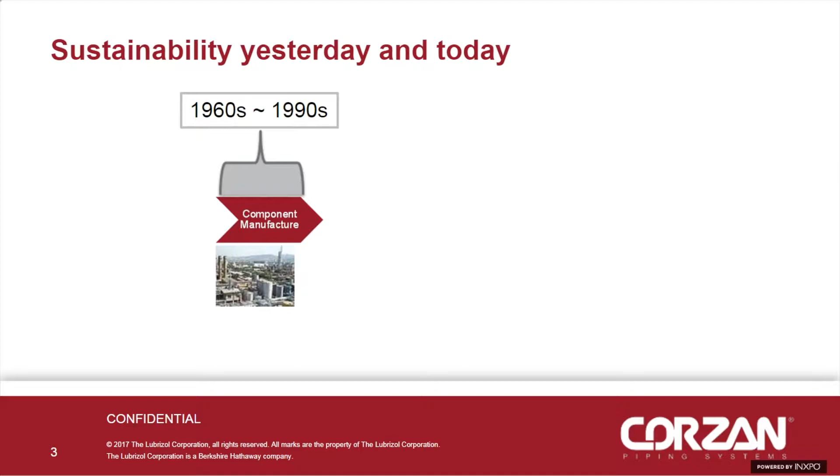And if we can advance the slide to number 4 there. Let's see if... there we go. What's really happened since that early phase is growing sophistication in the analysis and a growing awareness that there's more to environmental impact than simply what happens inside the gates of a manufacturing facility.

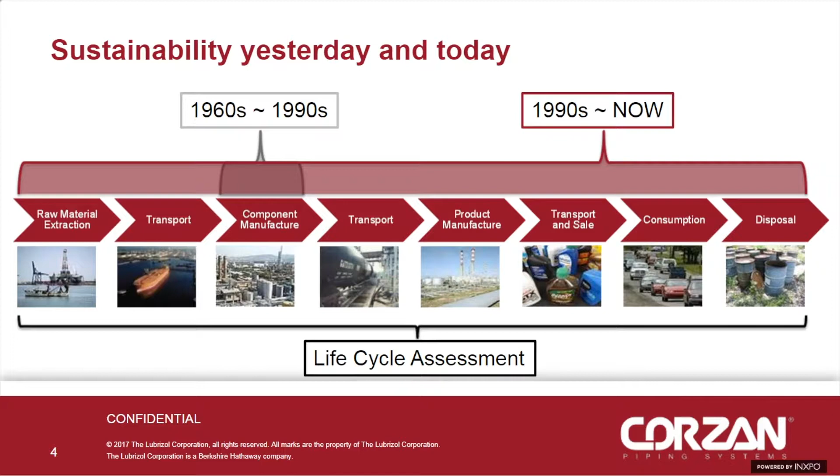So to look at the true life cycle of a product means going upstream to raw material extraction, through the transportation of the materials, the manufacturing of the materials, down through the finished product manufacture, again including transportation, the actual use or consumption, and the end of life as well. Taking the totality of all of those impacts is what life cycle assessment is all about.

What you're seeing here is a visualization of that analytical process, where every step has inputs and outputs. Usually the inputs are raw materials and energy, and the outputs are waste streams, be they solid, air, or water. By tallying them all up over the life cycle, that's when you get the total impact of a given product.

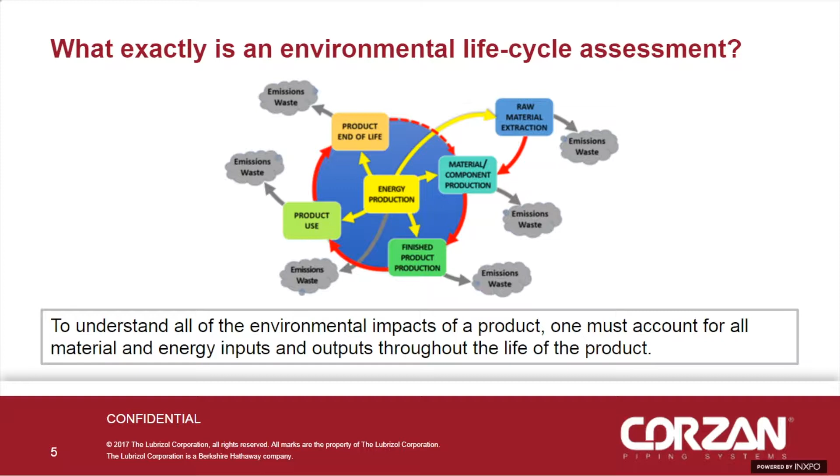There does seem to be a fair amount of confusion when we talk about terminology around life cycle assessments. You will frequently see businesses talking about emissions, energy, and waste, and these are all what I'd characterize as inputs to the analysis. They are the source of the environmental analysis that takes place.

What comes out of that analysis are what I'll call the impacts. Part of what drives me slightly crazy is everybody wants to be green. Well, there is no definition of green. Green is not one thing. When you talk about environmental impacts, you are talking about a basket of different impacts, be it acidification, which is an air emissions issue.

Acidification is the deposition of acids from air emissions onto forests, farmland, or urban areas. Climate change is probably the most well-known. Eutrophication is basically the runoff of fertilizer-type materials into freshwater bodies that leads to oxygen deprivation, and you'll see algae blooms that kill off all aquatic life.

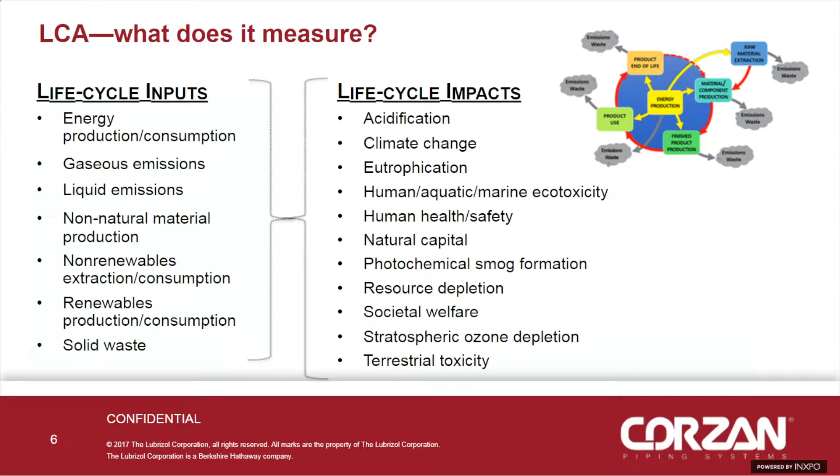If you were to take the life cycle impacts, what can you do with them? I think first you can use them to identify burden shifting. In some cases, you may change your manufacturing process to reduce your VOC emissions, let's say, but in that process you wind up increasing the burden at end of life because you've made the final product more hazardous.

The point is understanding that you can't necessarily guarantee that any improvement you make won't have a negative consequence, and life cycle assessments help you identify those trade-offs. You can either shift impacts along the value chain - I reduce my manufacturing and increase my useful life - or I make a shift among impacts, reducing toxicity but increasing climate change.

Or the final option: I'm no longer doing it myself - I've pushed it upstream to my supplier or overseas, understanding that it doesn't go away. It's still part of your life cycle, even if it's not within your gate anymore.

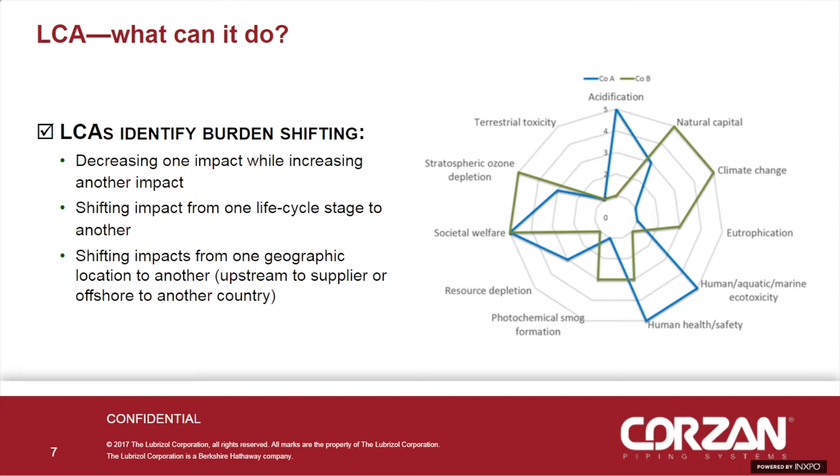The other opportunities that life cycle assessment provides are identifying trends. To the extent that you look at life cycle analysis over time, you can see a shift from one impact to another, an increase or decrease. It looks at orders of magnitude. Any LCA I look at, if there's a decimal point, I'm suspicious. The number of assumptions that go into an LCA analysis are such that it's basically safe for orders of magnitude change, but no more.

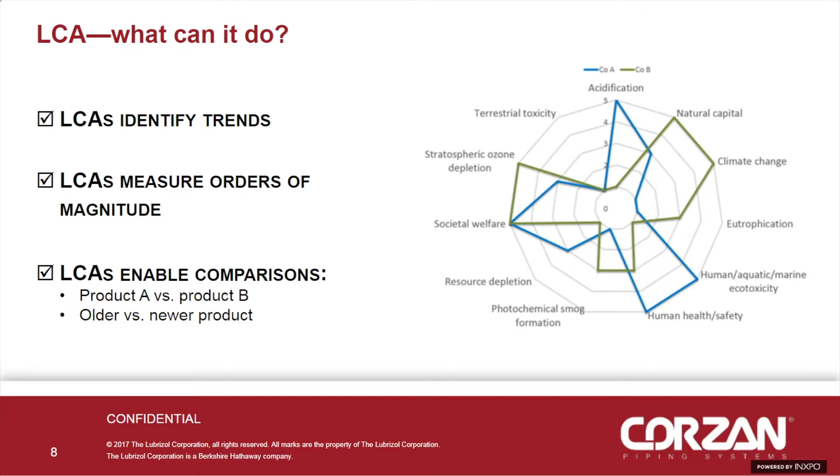It also allows you to enable comparisons among different products, and this is part of the challenge, either looking at different products or an older version versus a newer one. You'll frequently see in the contemporary literature third parties giving their opinion as to the environmental utility or threat posed by a given product or formulation. But those analyses don't necessarily tell you what you can do instead. They don't give you that comparative analysis. LCAs give you that basis for analysis.

What we're showing you now are a couple examples of the sort of work we have done looking at CPVC piping. And I'm going to turn this back over to Tom now to give you a more detailed understanding of what Lubrizol actually has been doing.

Thanks, Terry. So as Terry outlined, LCAs offer a very comprehensive assessment of impacts, and they can be used to optimize the resources needed to build and maintain our buildings. But with all this data, what do you do with it? How do you make comparisons? These LCAs can be over 100 pages of data, and that's quite a bit for any one person to sort through for every single building product in a building. You all know too well there are way too many building products in a single building to do that for every single one. So the market is starting to look for manufacturers and third parties to help them make those assessments.

So at Lubrizol, we've put in a lot of effort and work to generate LCAs on our piping systems and to begin comparing the outputs to other options within that functional category. You can see two examples here for plumbing pipe, CPVC and PEX outputs, and then also for fire sprinkler pipe, where we're looking at CPVC fire sprinkler pipe versus steel piping systems.

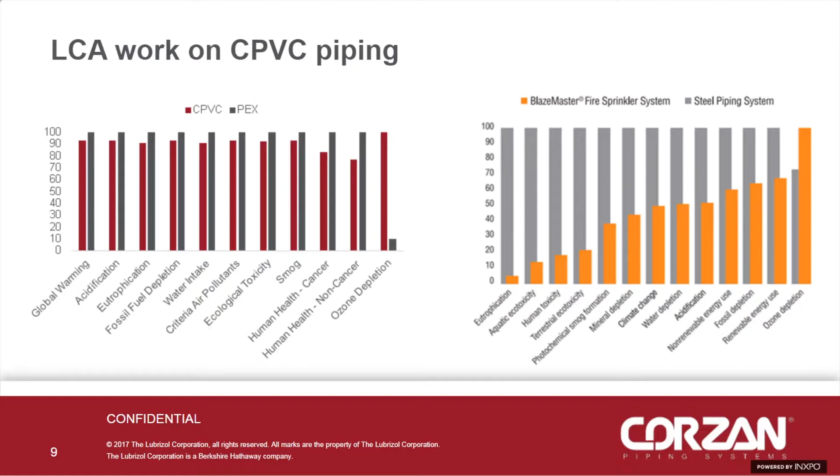And that's an important point I want to move into when we're talking about some of these sustainability assessment tools, rating systems. I want to talk a little about LEED. I think most people are familiar with LEED and what it has done for the building industry. For those that aren't, it's Leadership in Energy and Environmental Design. It's administered by the U.S. Green Building Council, and it's pretty widely accepted in the sustainable building realm. So I want to talk about how we can use life cycle assessments and the information from them within this context of LEED and what they're doing to help guide us in this realm.

So we talked about life cycle assessments and how they really encourage transparency. They don't give you a comparative analysis, and each output has its own individual unit of measure. So it's very much confined to comparing that output to the similar output of maybe a comparative material.

So how is the recent LEED v4 version helping us work through this? Well, it encourages transparency. By simply having a product LCA, that can get you credits toward your LEED certification. And more piping systems and fixtures are showing this.

The first one is integrative analysis, the second is health and exposure, and the third is supply chain optimization. For integrative analysis and supply chain optimization, these really are truly transparency credits. They encourage companies to perform life cycle assessments and really dig into their depths to find where they could do better, and share that information so people can make educated decisions.

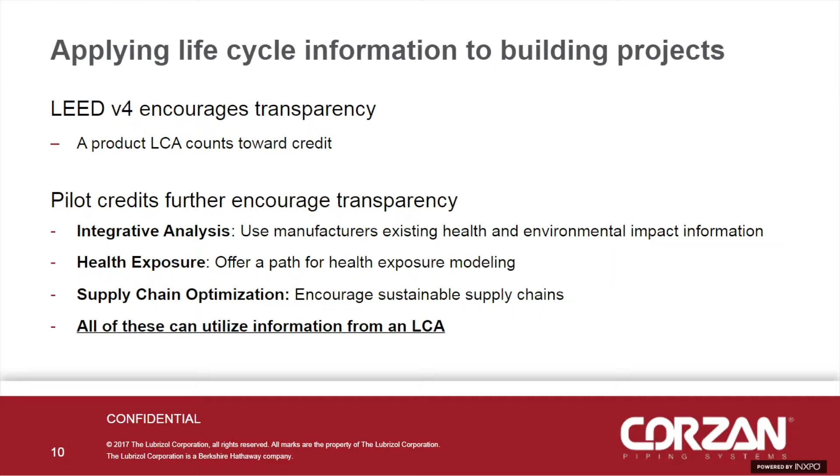The health and exposure credit is interesting because it takes some of the information that companies have provided and does exposure modeling, which is a new approach we hope takes off in the future. I don't have time to go in depth into these pilot credits now, but if you have questions, feel free to reach out to us or to the U.S. Green Building Council. We'll be happy to help you walk through those.

I want to talk a little more in depth about the integrative analysis of building materials pilot credit. This pilot credit was set up kind of like the outputs of an LCA. So you have various life cycle stages: product assembly, manufacture, installation, use, and maintenance of that product, and then what happens at the end of its life. You have three impact categories: human health, occupant safety, and environmental impacts.

The way this credit is set up is that the building product manufacturer takes the information known to them, which could be from an LCA, but could also be from other sources. It could be from safety data sheets, from product listings such as those through NSF or UL, or their own internal data. They can fill out this matrix with statements addressing each of these impact categories within each of the life cycle stages.

Those statements have to be backed up with documentation, but what it provides is a stepping stone for companies or people who don't have the resources yet to put into an LCA, but do have a lot of information and knowledge about their product and want to get that out there so you can make educated decisions about what you're using.

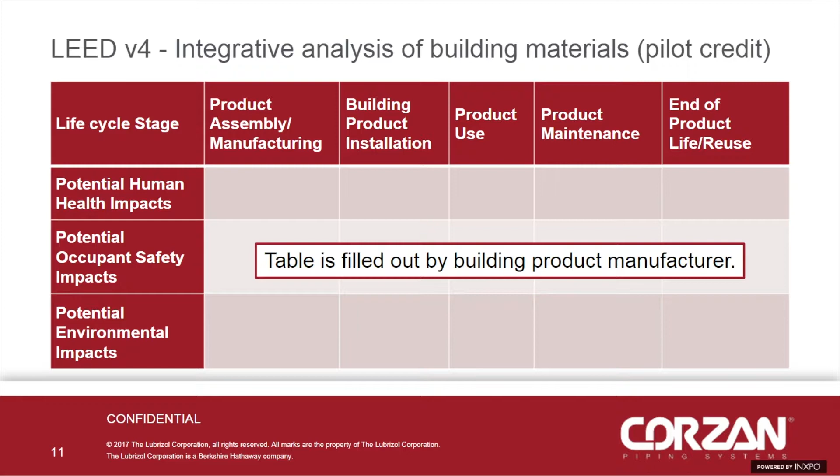I want to touch a little bit on occupant health. This, I think, is the one point within this whole realm of sustainability that piping systems can possibly have the greatest impact on, because we touch something that is being consumed by humans.

A lot of people have heard of Legionella and may be familiar with ASHRAE 188. There are two aspects of this standard: it provides guidance for prevention and mitigation of microbial growth in piping systems. For prevention, think about how a piping system material will change over time and how this will affect the harboring of bacteria.

If you think about sustainability within a building, you really want your systems that you install to last the life of the building. Having to take out and repipe systems really affects the sustainability and utility of your building and can introduce new hazards to the occupants. So the ideal is to install your mechanical systems into a building and not have to touch them for the life of the building.

Think about the effects of water on your piping components and how it might create opportunities for bacteria to be harbored. We're talking about corrosion and pitting in piping, lack of flow in piping systems as well. These things really encourage the growth of bacteria. So when you're thinking about piping system materials, make sure you're thinking about the system you're designing and the water going through it and how it's going to affect that piping material.

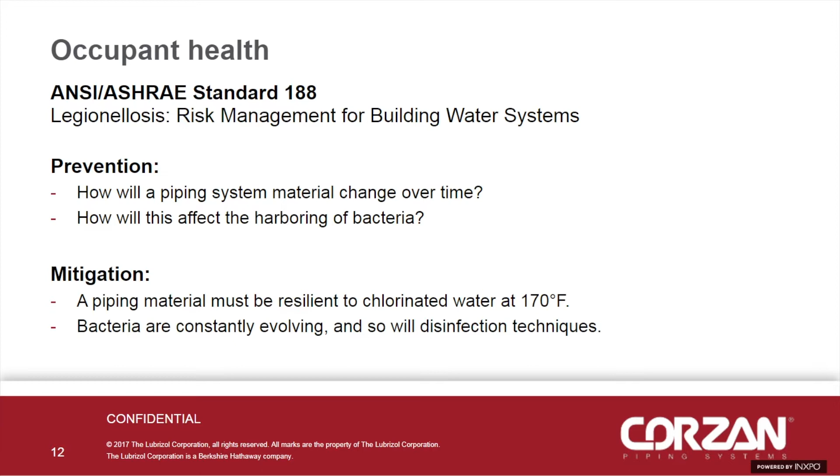I want to continue on occupant health because I think it is an important topic for piping systems. A lot of you are probably familiar with NSF 61 and the Drinking Water System Components Health Effects Standards. This really feeds into the LEED heavy metal reduction credit that exists out there. I'll summarize these at the end of the presentation, but your piping systems can help achieve those kinds of credits just by being listed to these standards.

It's a very important standard to understand, again similar to ASHRAE 188, when you're thinking about the water going into your building: what kind of ranges of pHs are going to be exposed to it, how does that affect any kind of leaching out of components or materials in your piping system, and what temperatures your piping system will be exposed to.

The standard tests pHs based on the type of material. So copper is tested at 6.5. Other materials are tested at a range from 5 to 8 or 10 on the pH scale. Materials are also tested, all of them, at 73 degrees, but then depending on their final temperature rating, it could be 140 or 180.

So when you're thinking about the types of systems you're installing, especially in commercial buildings or in places of the country where the water quality is not near a neutral pH, which a lot probably aren't, you need to be thinking about what types of piping materials you're using to ensure that you're providing a sustainable solution for your piping systems in that building.

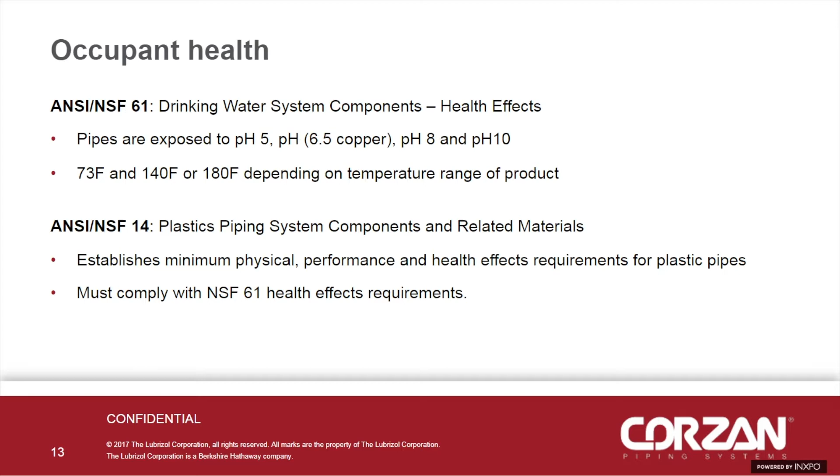So I think the final takeaway from this is that we think water is a pretty benign, inert substance, but it's not. It has different chemistries, and the chemistries are alive, and it's affected by things that are dissolved in it. And so we need to be aware of that and how it affects our health and how it affects our piping systems.

So I'll review a little bit about LEED and LEED v4 in the building design and construction arena. A lot of what piping systems can get you as far as credits are within this materials and resource section. We didn't talk much about landfill diversion in this, but it is part of the LCAs for that end of life phase, and it's an important part of LEED v4.

So you look at the recyclability of your piping materials. This is really a big charge within LEED, recyclability, making sure that when you're demolishing buildings you have some kind of waste management plan and that you're segregating materials, but then also during the construction phase that you have the ability to collect those recyclables and find an outlet for them.

So I think a lot of people are familiar with metal recycling and its ability to be recycled. But when you're looking at non-metallic systems, all thermoplastics are recyclable. So check with your local recyclers to see what kind of streams they'll take, and make sure you set up storage and separation for those materials, because it's not trivial, and it can really help in the long term, reduce the long-term impact of construction and that changeover in building stock that I talked about.

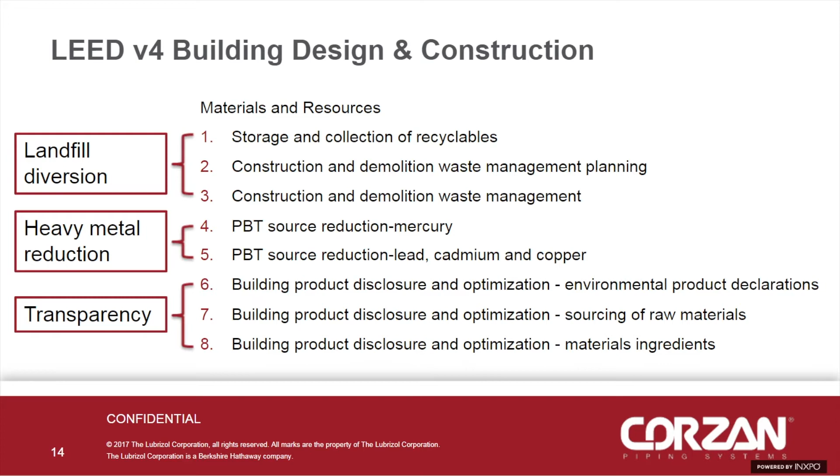Yeah, it's definitely a challenge going forward. Not insurmountable, but will take some resources.

I also want to touch on some VOC reduction credits. This mostly applies to non-metallic pipe, such as ABS, PVC, and CPVC, when using solvent cements. Major solvent cement suppliers in North America offer low VOC solvent cements, which conform to Air Resources Board standards. Keep those in mind when looking for LEED credits, because they exist and they're out there. They've really done a lot to help with retrofits as well, with occupant health and safety.

So I touched on the pilot credits, and I summarized them down there. You have the integrative analysis of building materials, that was the matrix I talked about. That's something to ask your product suppliers about. Take it to them and say, could you fill this out for me, or do you have information that might apply to this credit? Just challenge them and see what you get out of it.

Building material, human hazard, and exposure assessment - that one is in an earlier stage than integrative analysis. We're working through exposure modeling and seeing what comes of it when a material supplier like Lubrizol provides their formulas, their recipes, for exposure modeling, and what kind of outputs we get from that. So that's still in an earlier stage, but look for that to come. And then we talked about the supply chain optimization credit.

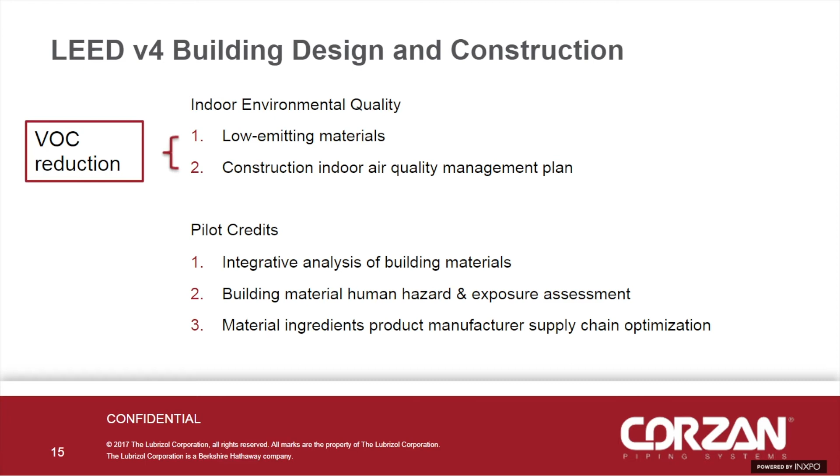Another great place to look is the UL Spot database, which is coming online and really growing. It's a nice database of building products, and they collect any kind of product certifications and LEED credits associated with the products. So you can search through categories and find products that apply toward LEED but also have other certifications within that database. And now there's a plugin for that into Revit, so you can access that database through Revit, which is becoming a very powerful tool - while you're working in Autodesk with your Revit files, it can pull in from that Spot database.

And then finally, we talked a little bit about environmental product declarations. To educate yourself more, if you're interested in how this is all coming together, there are two sites I would recommend. The Program Operators website is a consortium of people like ASTM who are creating these product category rules, and as more get created, they update the site and explain those category rules, what the application is, and what the functional unit is. They also have a catalog of existing EPDs and the product categories.